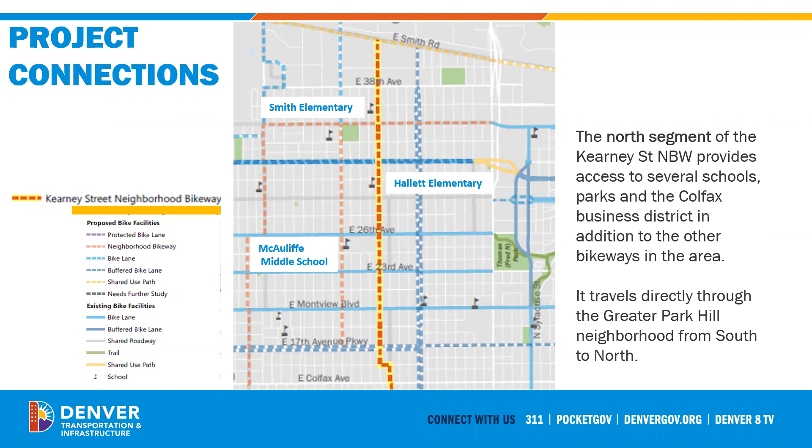One of the other reasons for the particular routing chosen from the Denver Moves plan was also to connect into the Cherry Creek Trail.

There is a spur that's south of Virginia Street that would connect people riding bikes and pedestrians to the Cherry Creek Trail. Again, that's one of the reasons for this particular alignment.

We have continued to get quite a few questions, and I understand there's some confusion about what a neighborhood bikeway is. So I'm going to talk through a little bit about what that is before we show a video that will help provide some additional explanation.

As I mentioned before, a neighborhood bikeway is not a painted bike lane. It's a shared street, just like what it is today.

Bikes and cars share the roadway, but we really focus improvements at the intersections, designed to make it safer for people walking, biking, and driving, and help them get across the street more safely.

The majority of the improvements recommended from a neighborhood bikeway are signage and pavement markings, just like what you see on the screen.

At select locations where we hear from the community that there is a challenge with speeding, or that there are challenges getting across the street, we may recommend some improvements.

Such as curb extensions, which is what you see on the screen, or a traffic circle, or things that are designed to slow down vehicles and slow down speeding traffic.

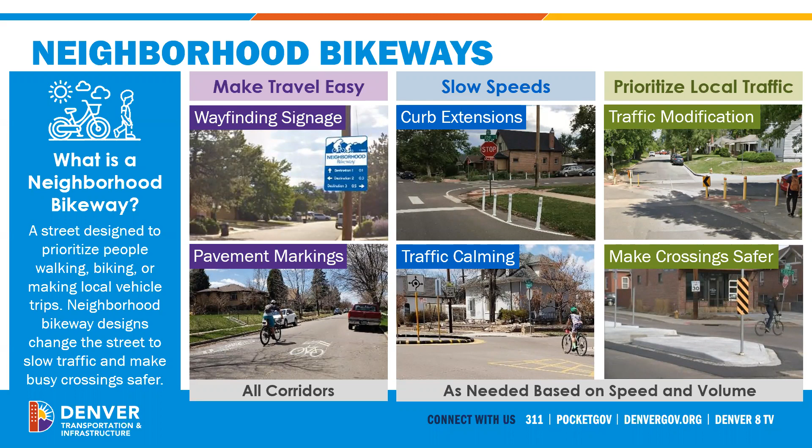So once again, just to highlight, the purpose of neighborhood bikeways is design treatments that prioritize safety. They are also meant to increase the visibility of everyone using the street today, and are designed to slow down speeds and restrict traffic volumes.

There's also a question we oftentimes get, which is: is parking eliminated throughout the corridor? And the answer to that is no. Based on it being a shared condition, parking remains intact throughout.

We're going to show you a quick video so we can show you what a neighborhood bikeway looks like in a Denver example, on West 35th in the Highland neighborhood. We'll give you just a 20-second video that I'll walk you through. This is an example of a traffic circle that you can see, again, on West 35th.

There's only about 2 or 3 of these proposed on the corridor. Other than that, you can see it's shared. There's also a bulb out or curb extension. So that's really what a neighborhood bikeway is.

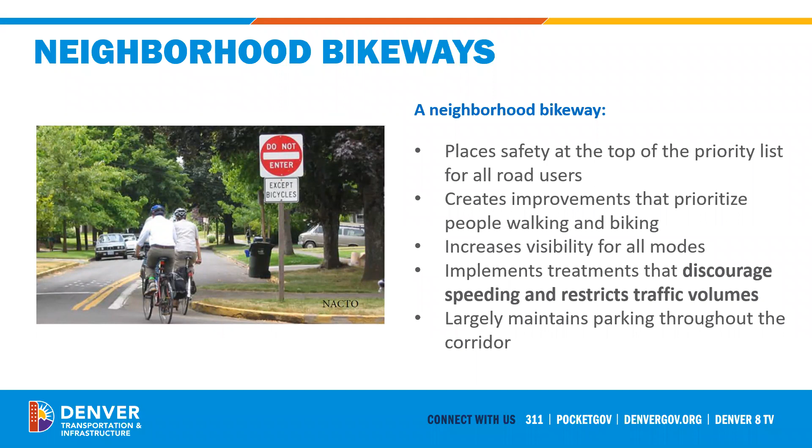You won't notice a whole lot in between the intersections, but again, it's just focusing on safety improvements that help people more safely get across the street. That's really the purpose of them. So on the next slide, we're going to pause for questions before we get into what is being recommended and how you can provide your input.

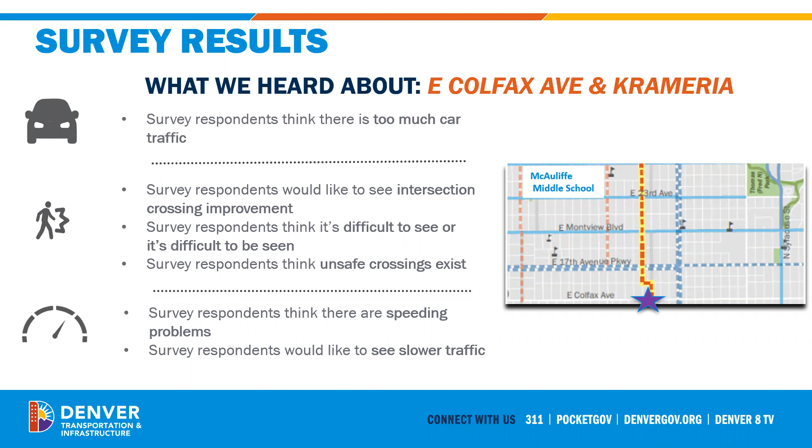We also heard about potential speeding problems and concerns and a desire to see slower traffic. I do want to note we are still evaluating East Colfax and Krameria, understanding exactly what options will look like here. So while we don't have a particular concept to show at this intersection today, in our second round concept surveys we are looking to gather more feedback to help us do further analysis and guide what the solution looks like here.

With that, I am now going to talk about our concept designs and how we can continue to provide feedback as a community on those designs. See the website here, that's bit.ly/KearneySurvey2, where we have additional surveys open that are a little more detailed than the first survey we had open earlier in the spring.

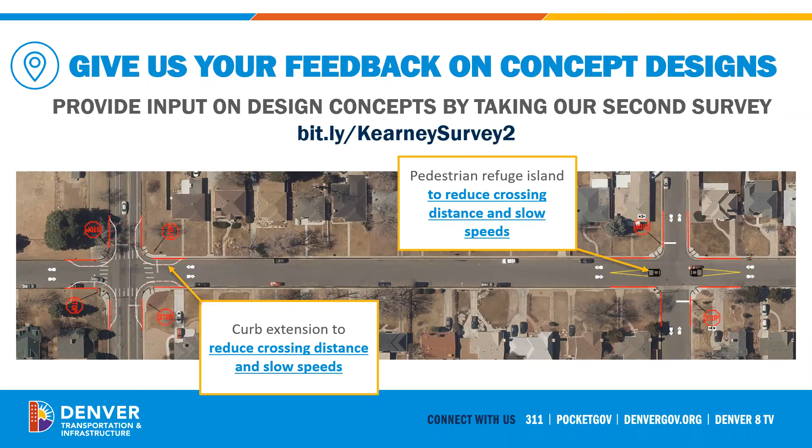You will see some examples of the concept design as we have it developed so far, and have an opportunity to give us additional feedback and answer some questions to help ensure we're hitting the mark and really hearing what the particular problems and concerns are across the corridor, so we can align our designs to match and meet those based on what we're hearing from the community.

These were all locations that popped up in our initial survey, and you'll see that reflected in the surveys we are launching tonight, with some of our initial ideas of how to address that, as well as designs throughout the corridor. With that, I'm going to hand it off to Taylor to speak in more detail about what some of our initial concept designs are looking like, given the feedback we heard earlier this spring.

Taylor: Thanks, Ellen. So I'm going to walk us through what we heard from our previous survey, as well as some of the types of improvements you might see in our initial design for Kearney and Krameria.

One of the most common concerns we heard is that many of the intersections along the corridor need crossing improvements. These types of improvements can come in all shapes and sizes depending on the street in question. For intersections of two local streets with lower vehicle speeds and volumes, something like a curb extension can help people walking, biking, and driving to see one another and shorten the crossing distance for people walking. At more major intersections, things like pedestrian signals and short bike lanes and waiting spaces for bicyclists at the intersection, like those in the photos, might be needed.

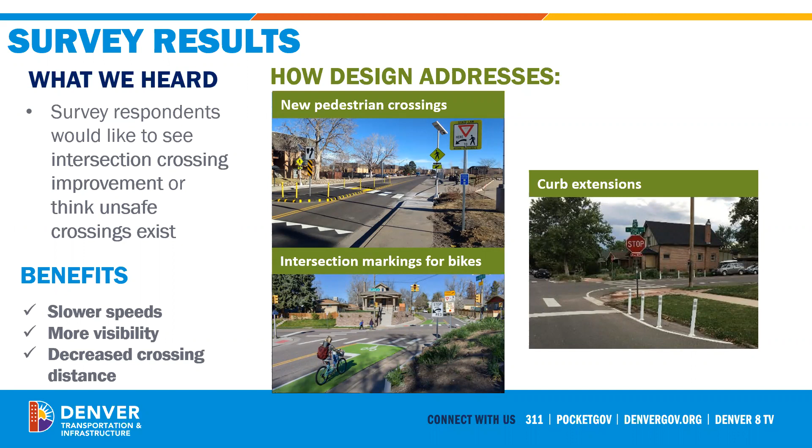You'll see all three types of treatments along the corridor.

So we also heard that there are locations where it's difficult to see or be seen along the corridor. Treatments like curb extensions and marked crosswalks can help motorists be more aware that people may be crossing the street. They also help all roadway users see each other, increasing visibility and yielding rates.

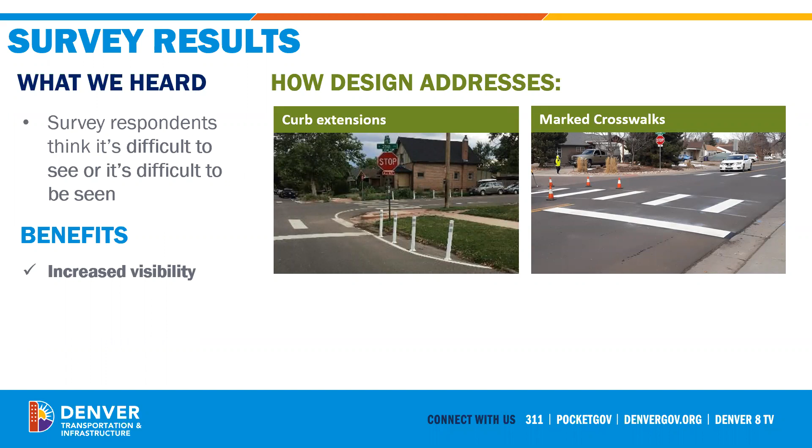Many people would also like to see slower motor vehicle traffic on the corridor. Traffic circles are one such improvement, placed in the middle of intersections to help slow vehicle speeds and increase driver awareness. Some of the treatments we talked about before, including curb extensions, can also have a similar effect.

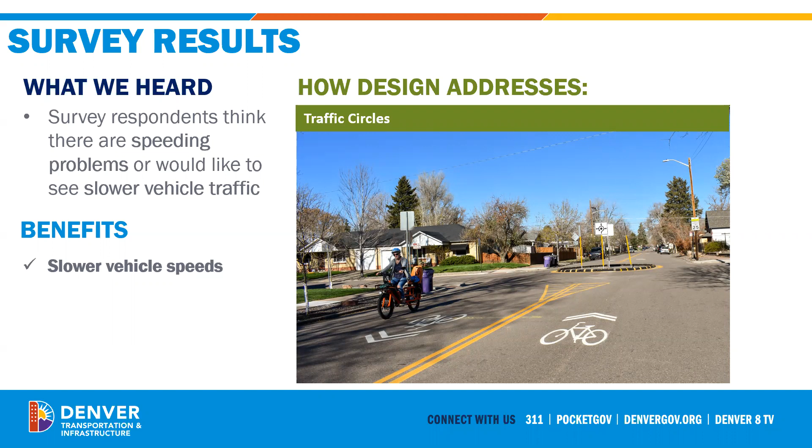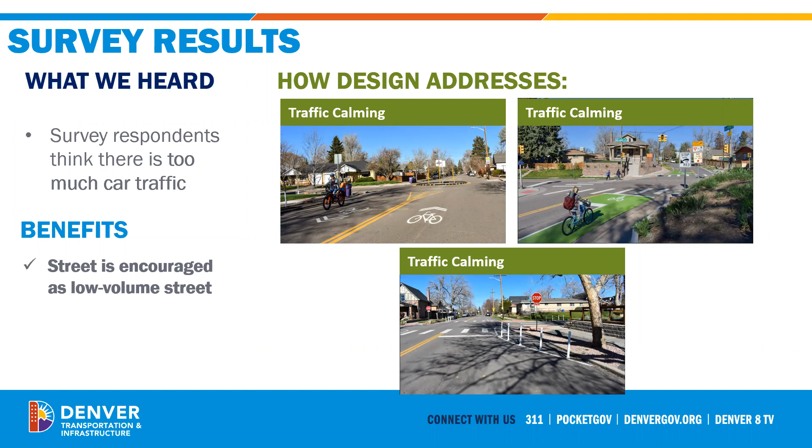So with that, I'd like to open it up for, I guess we have another discussion question time.

Wonderful, thank you. We have a lot of questions and we're going to try and get to every single one. If we can't, we will make sure that we have a frequently asked questions document that you can refer to online, and we'll get that uploaded as soon as we possibly can. We're going to start with a question from Amy, who states that she understands this project will not affect parking, but she does have a specific question about parking on Kearney between 22nd and 23rd, in front of a business block on the corridor at that point.

Riley, do you want me to take that one? Sure. Great. Yeah, thanks, Nora. This is a good question.

So as Riley indicated earlier, the selection of a neighborhood bikeway is intended not to affect parking on the corridor and change the parking supply on the corridor. The block between 22nd Avenue and 23rd Avenue in the business district is a unique block on the corridor for sure. Currently, that block has angled parking on both sides, specifically front-end angled parking on both sides. The work thus far does not recommend changing the supply there, so the number of parking spaces would not be changed on Kearney.